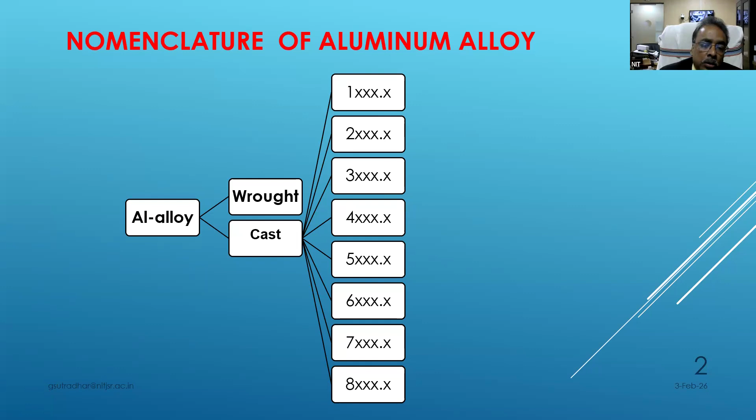Now I will show you. When it is 1 dot dot dot dot, normally we are using it as an unalloyed composition of aluminum only.

When 2 is coming, that means copper is the major constituent of the alloy. When 3 is coming, it is aluminum silicon alloy. 4 is coming, it is also aluminum silicon alloy binary. Then 5, previously 3 was aluminum silicon alloy with copper.

5 is coming when the aluminum alloy contains magnesium as a major element. Like this, the nomenclature continues up to 8. 8 means aluminum alloy containing tin as a major alloying element. So this is the basic structure where a person could understand the major alloying constituent in a particular alloy.

Now, during my lecture, I will use 3 abbreviations. That is solution heat treatment. Normally we do this for non-ferrous, particularly aluminum alloys, which are very responsive to heat treatment. Normally T6 is used, which is a little different from ferrous heat treatment, and that is called T6 heat treatment. It is already written in specific customer specifications that you should follow the T6 heat treatment.

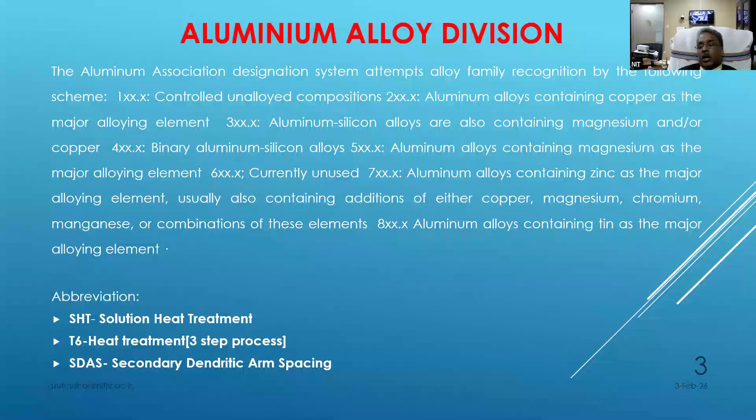So these are the abbreviations I will use. Now, the question is, why is aluminum and copper alloy preferred to other ferrous alloys?

See, normally we know that nickel-based iron alloys or different types of steel alloys where manganese is present are basically preferred for high temperature applications. But its density is much higher than aluminum. Aluminum is almost 1/3 the density of steel and cast iron. So to get the advantage of lighter alloys over ferrous alloys, aluminum alloys are being preferred.

So in this case, we have taken only aluminum, copper and its series. We have tried aluminum copper alloy and tried to see how it performs at high temperature applications.

Now there is a thumb rule. Many people, I cannot say any single person, but it is almost a thumb rule that if you want to make a car, or any automotive or prime mover, you could make it energy efficient by 25%, because we can get that if we make 35% weight reduction.

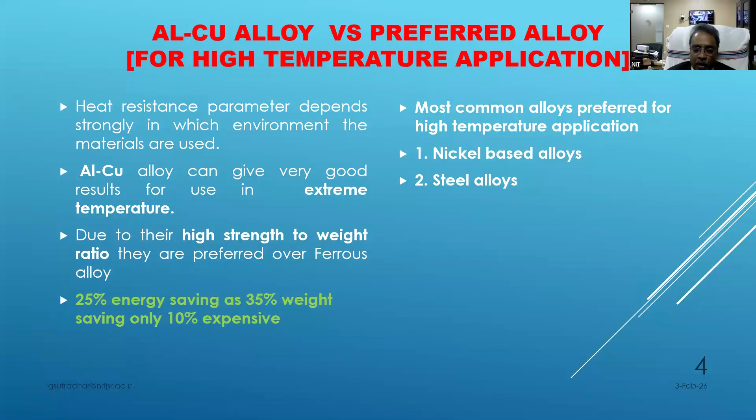Number two, now aluminum is normally alloyed with copper, magnesium, silicon as the major alloying elements. These elements - copper, magnesium, silicon - help increase the tensile behavior of the alloy. Even aluminum with copper and magnesium can give good mechanical properties under high temperature applications.

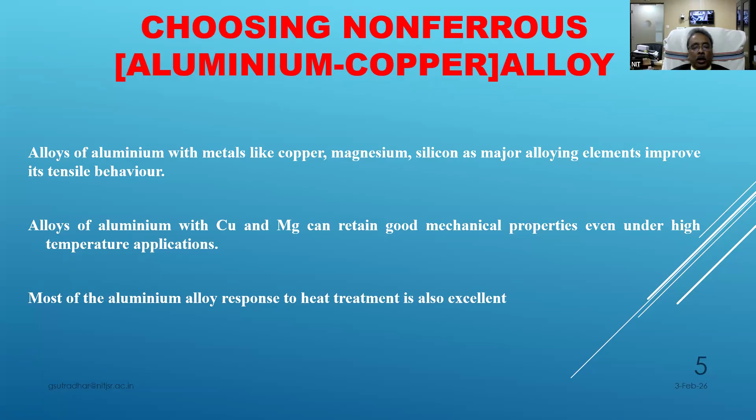Now it is also observed during our study that most aluminum alloys are very responsive to heat treatment. Now, this is another part I am telling you.

Now I am talking about high temperature. What is high temperature? Normally, from literature, it is observed that around 200 to 250, almost 260 elevated temperature is considered as a boundary condition.

That means we work within the limit zone of 250 degrees centigrade. Number two, whatever castings we make, our objective is that it should be good castable. If the castability is very poor, whether in sand molding or gravity die casting, it cannot fill the cavity. So considering castability, we have to optimize the alloy composition as well as the mechanical and metallurgical properties of a component.

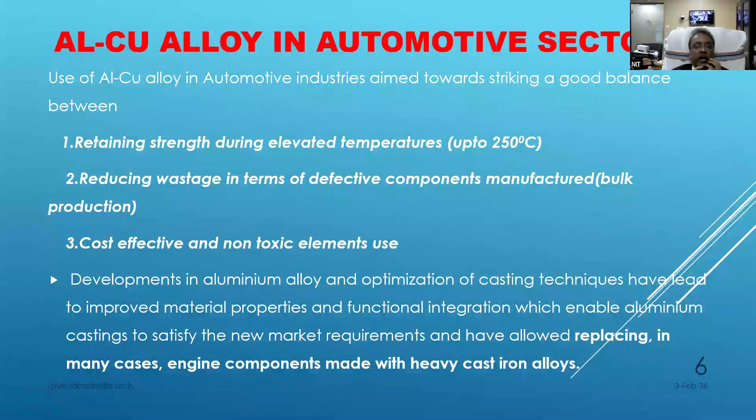We always think the product should be most cost effective. That's why we consider aluminum alloy and optimize the casting technique, meaning castability and improved material properties with functional behavior. Functional behavior is very important, whether that aluminum casting is used for a manhole cover or for automobile engine parts like cylinder head or cylinder block castings, or aerospace parts like an aeroplane seat component. So where it is basically used matters; functional behavior is a very important part.

Now if we consider any passenger or normal car, total engine parts is around 50% of the total weight. Out of that, 90% comes from cast aluminum. So if total car weight is 100, engine parts is 50 kg. Out of that, 45 kg is from cast aluminum, and the rest 5 kg is from wrought aluminum, either forging or extrusion part.

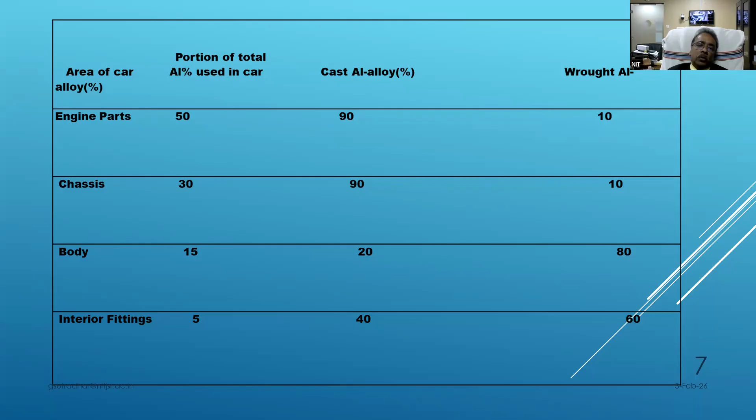So maximum is 10% wrought. Now chassis is basically around 30% of the total car weight. If car weight is 100, chassis must be 30 kg. Out of that, cast alloy is around 27 kg, and the last 3 kg is wrought aluminum alloy, similarly for the body. So major car weight is 50% engine part, 30% chassis, 15% body, and 5% interior decoration.

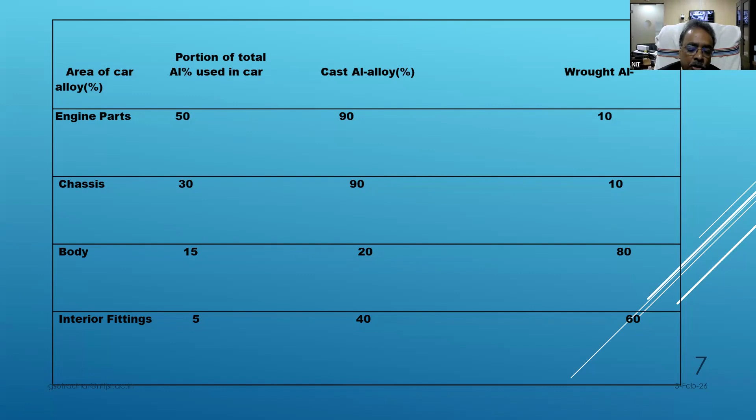The interior fittings, which is 5%, is going to increase day by day because of the luxury demands of customers.

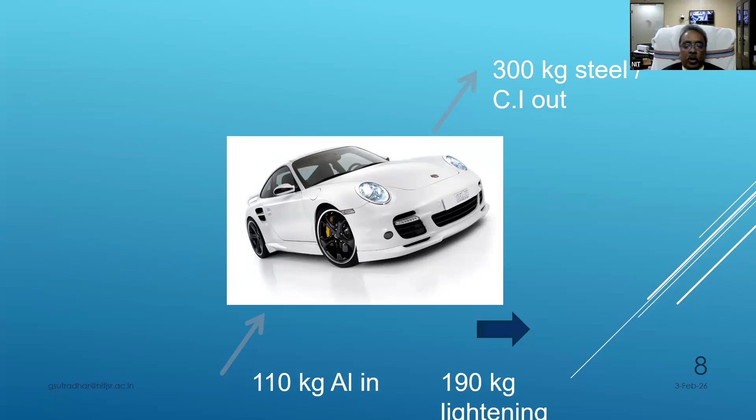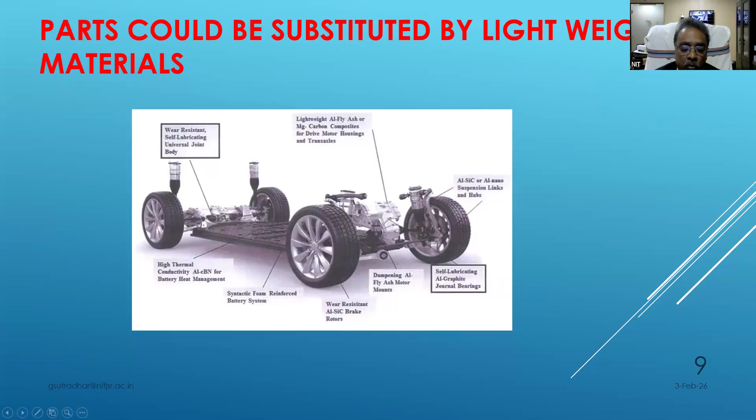From the literature, or as my student has found, exclusively for body parts, auto body, aluminum has good formability. Along with castability, formability is needed for sheet metal working, and drawing capability is also very good.

I want to mention that British Land Rover uses a V8 engine block made from aluminum alloys. Other parts like wheels, transmission, cylinder heads, and suspensions are also really made from aluminum alloy only. Now electric vehicles are taking a strong lead in the automobile sector, and they also choose their main components from lightweight material like aluminum.

So our basic objective in this research work has three parts. The first part is the development of an alloy system, preferably without silicon. The silicon here is only making the wrought aluminum or aluminum-copper master alloy. A very trace amount of silicon is already in the master alloy, but we are not adding any silicon in the master alloy. It will be aluminum 50% and copper 50% as the master alloy.

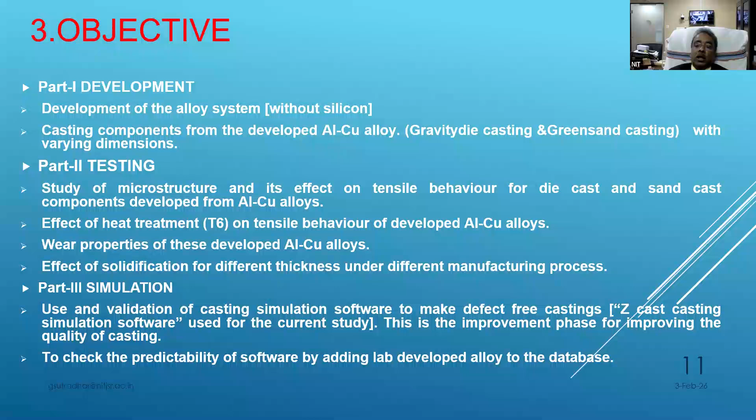Now, this ZCast software has some database. Now, with that database, the validation of this present alloy was also done, along with the database in that software.

So now, when developing any new alloy, what is happening? It is from the normal alloy, the process what we are following. One is the nucleation process, which happens to any alloy, then crystal growth, then grain structure, and the effect of additives on aluminum copper alloy are subject to studies.

Now, according to scientists, shear assisted processing and extrusion technology can eliminate heat treatment steps. This is because normally, processes like extrusion and forging do not need any kind of further processing, as the process itself takes care of it. But casting needs some additional secondary processes.

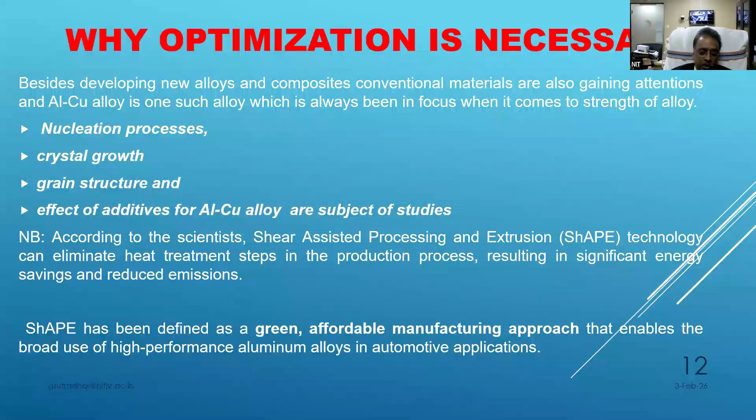So again, ShAPE is basically shear assisted processing and extrusion technology. We define it as the green affordable manufacturing approach that enables broad use of high performance aluminum alloy in automobile component applications. Now, what exactly does the literature say?

The literature gives something, because any PhD student, before starting the work, has to define his or her problem, and that is the literature review. Normally, we researchers find that almost 25 to 30% of time is basically involved in literature review. Otherwise, his or her work will not stand internationally. So that's why, if it is a 6-year project, almost 2 years actually go into defining the problem, finding which area is untouched or very few people have studied.

So literature says that aluminum copper alloy gives very good strength at room as well as under high temperature conditions, around 150, as already mentioned.

Now, heat treatment improves again its strength, its wear characteristics, and also the characterization of cast aluminum copper alloy. We have seen that finally the solution heat treatment was done. I will show the graph.

We will show the heat treatment curve, and after that we will find out that Al2Cu, which is basically the theta phase of the alloy, stays in the grain boundary and acts as a strengthening element, increasing in the grain boundary with the copper content. If you increase the copper content, then Al2Cu comes into the grain boundary and increases, and as it increases, the total matrix gets more strengthened.

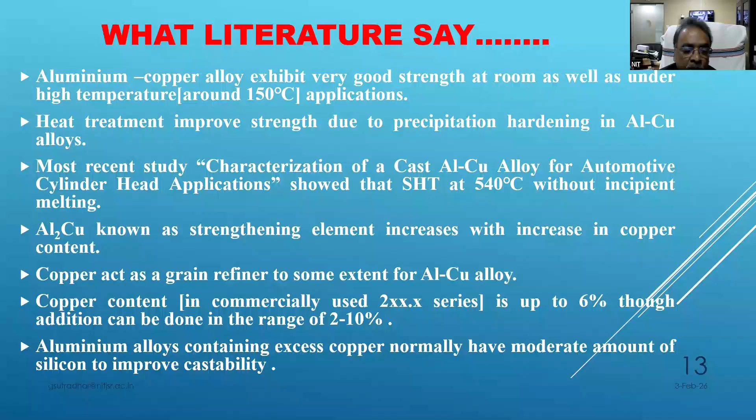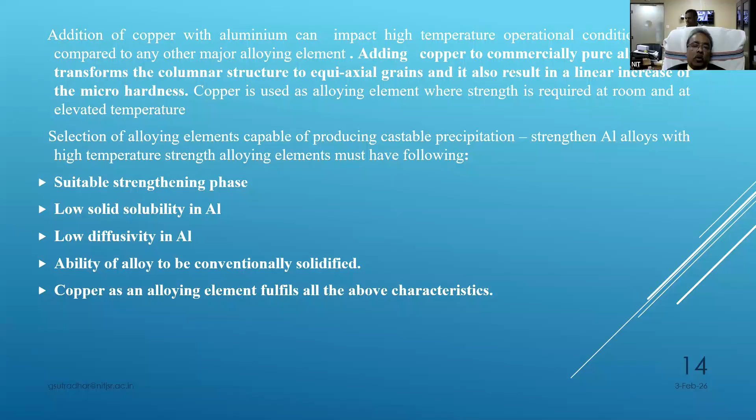Addition of copper with aluminum can impact high temperature operational conditions. If you want to make copper in the pure aluminum, the columnar structure and equiaxial grains result differently. I will show you when we see different amounts of copper in the material.

Now the recent important element is silicon. What is the effect of silicon in the aluminum matrix? We have already found out that copper in pure aluminum is chosen, as I said, maybe 2 to 10%. At room temperature and elevated temperature, we find that aluminum alloys commonly used are added with copper for improving strength and silicon for better castability. Even the corrosion resistance, as well as the strength, is improved at ambient temperature.

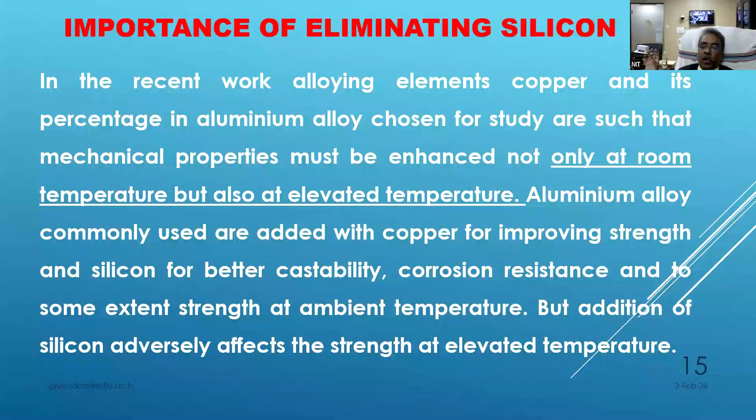But addition of silicon adversely affects the material after some point of time. If it is under elevated temperature, that is 250 and above, then silicon addition should be restricted after some time. So this work, actually, I will show you.

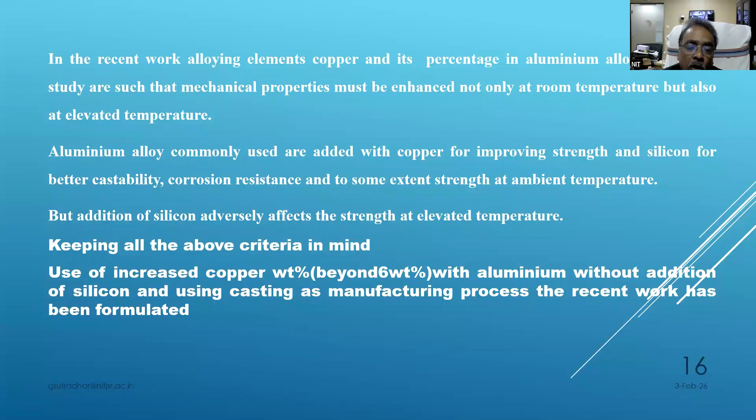Increased copper weight beyond 6% with aluminum, without addition of any silicon, using casting as the manufacturing method, has been formulated in recent work. We conditioned that we will go a little more than 6% of the weight of copper in aluminum, and without allowing any silicon, study how the material will behave, because silicon is not recommended at least at 250 degrees centigrade or above functioning conditions.

Now I will explain why copper is chosen. In this experiment, we have taken three things with minimum weight for copper addition in aluminum. We used a master alloy and went on adding aluminum to dilute it. Assume we have taken 300 grams or 300 units of aluminum-copper master alloy. From that we took three divisions, 100, 100, 100. From the first 100, one alloy was made with 4% copper - we go on adding from 50%, by calculation, slowly with the copper-aluminum master alloy. Then we want 8%, and maximum is 12%. So our main focus is 4 to 12% weight of copper in aluminum.

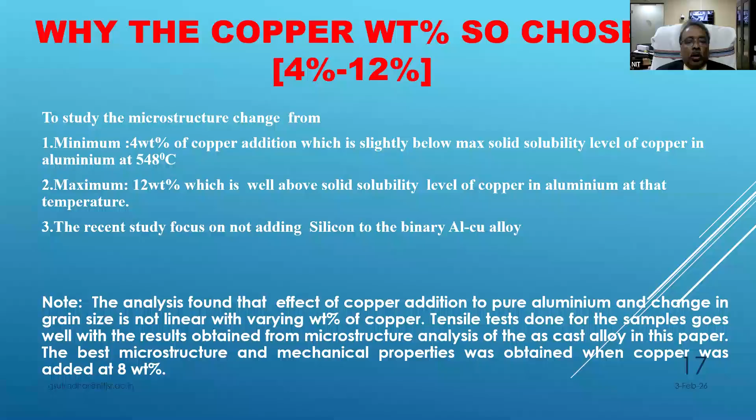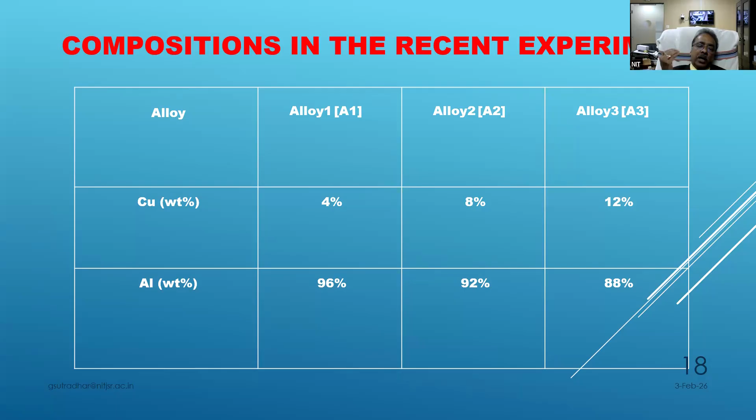Now see what is happening. This is alloy number 1, which we named A1. Then alloy 2 is A2, alloy 3 is A3. What is the difference? All the alloys have only a trace amount of silicon - below 0.001%. So copper is 4%, aluminum is the rest for A1. Alloy 2 is 8% copper and 92% aluminum, and alloy 3 is 12% and 88%.

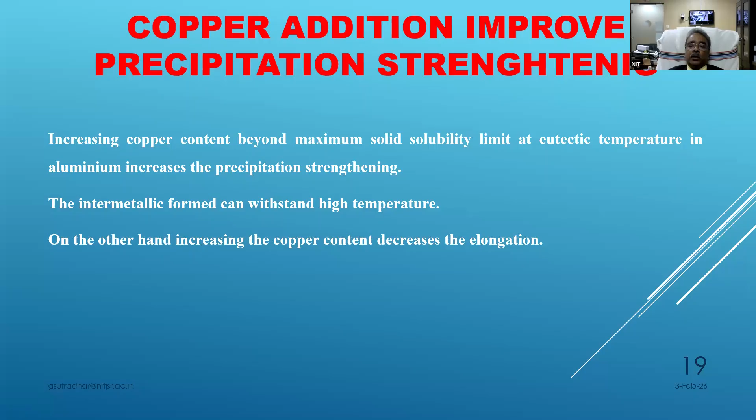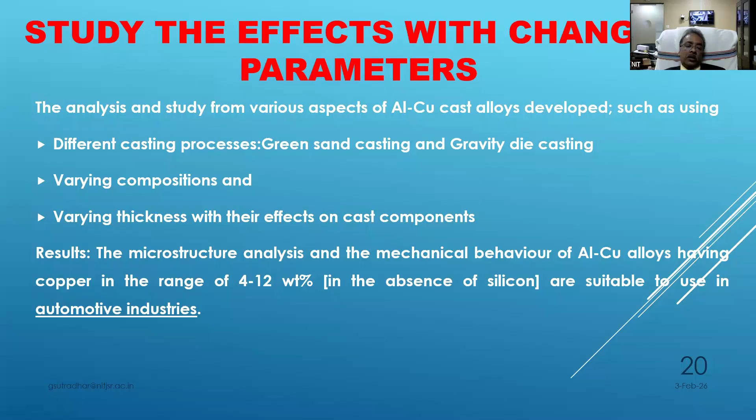Now what are the other parameters? We have worked in the green sand casting environment as well as gravity die casting. We changed the variation and also studied under different section thicknesses - the same casting having different cross sections. So what result is coming? The microstructure analysis and mechanical behavior of aluminum-copper alloy, having copper in the range of 4 to 12% in absence of silicon, is suitable for use in automotive industries, because engine parts or engine-related parts operate at temperatures of 150 to 250.

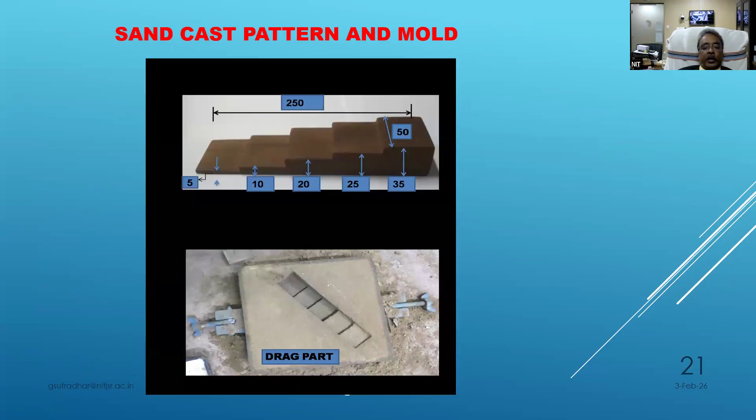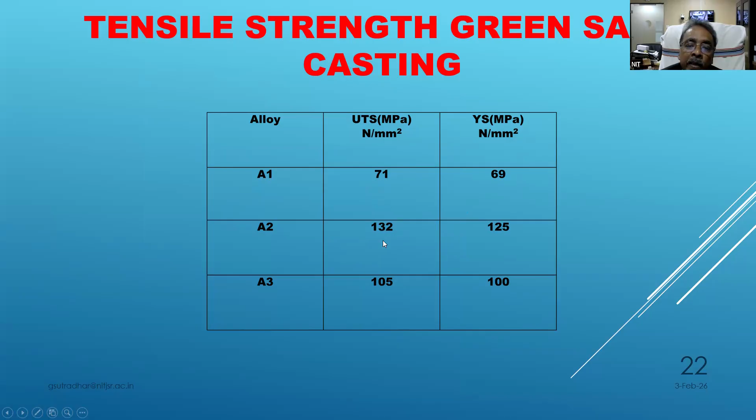So this is the pattern you can understand - that is a wooden pattern, and that is the drag part of the pattern. Then we have taken results from the different alloys. That is the A1 alloy, showing UTS, then yield stress. You can see that the 8% alloy is giving maximum UTS and maximum yield stress.

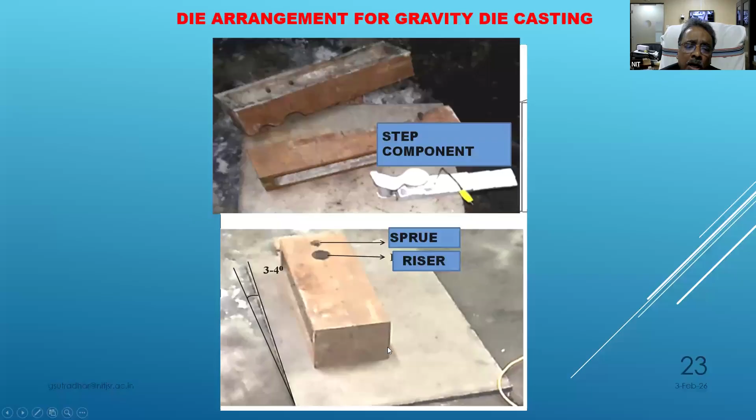Now the copper addition benefits and drawbacks. What are the differences, or challenges? Copper is added to aluminium when strength is a priority. Aluminium-copper alloys are very heat treatable and preferred for elevated temperature applications, as mentioned in our main title.

We have tried to see the mechanical properties of the aluminum alloy, and we have found out the castability. Corrosion resistance and ductility decreases.

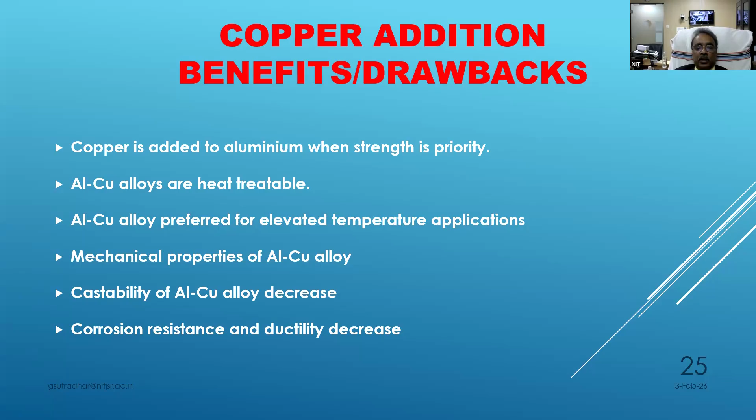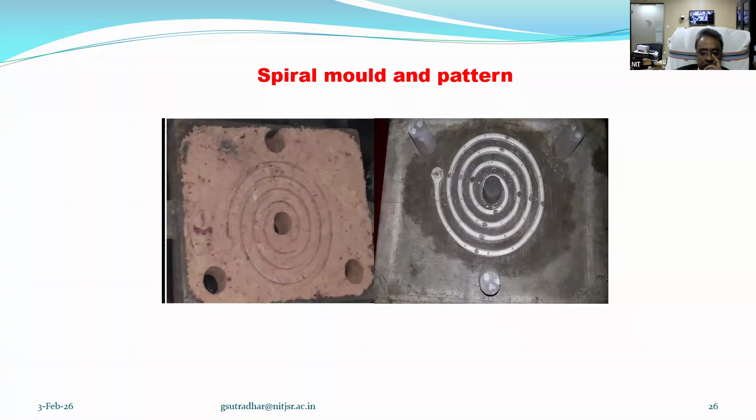So this is the spiral mold. This is a very old experiment. We put it under different temperatures, and the length of the spiral actually shows the castability. After that, we made all the points, and then we took the heat treatment.

This is a very peculiar and common heat treatment, the T6 I mentioned earlier. There is one step called solution treatment, which people in industry call solutionizing. Next is quenching, and after that, aging. So there are three steps.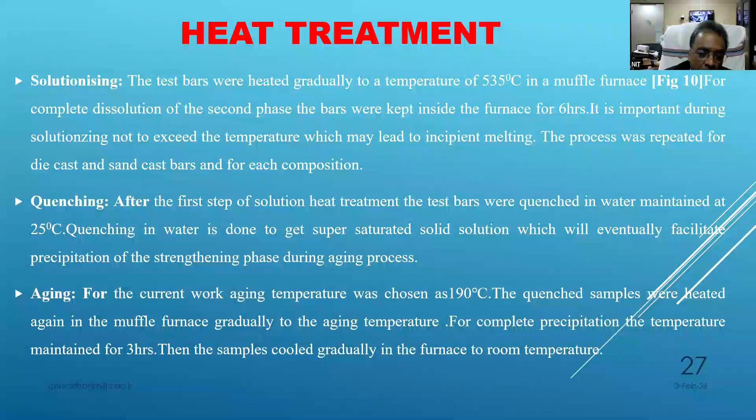I will show you the graph. First, in the furnace, this is room temperature, say 25 degrees, and it goes up depending on the alloy. If the basic alloy is LM11 or LM25, normally it is 520 to 535 degrees for heating.

This is the soaking zone. It depends on the thickness of the casting—it may be a minimum of 1 hour up to 8 hours, or even up to 8 to 12 hours. Then it immediately falls to around room temperature, and stays for some time.

Then it heats up again to 170-190 degrees, and this part is called aging. Basically in aging, it is precipitation hardening, as people also call it. These 6 hours are for this particular alloy, but for other alloys like LM25, LM9, or LM11, this may be 8 to 12 hours, and precipitation hardening may take 3 to 5 hours.

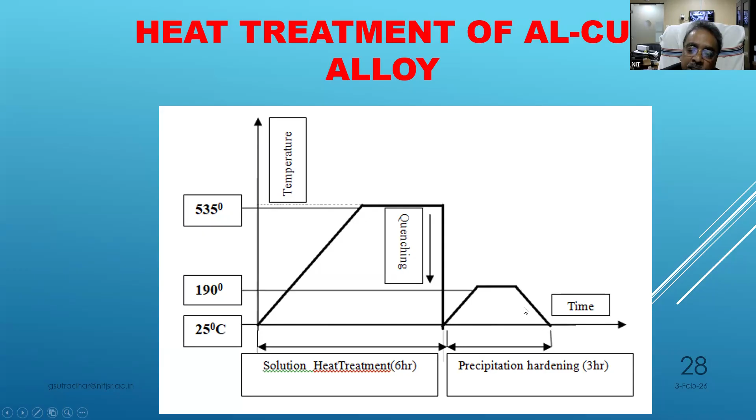After soaking, the total hours add up—roughly 1 hour here, 1 hour there, but it changes depending on the alloy. Now, if heat treated, the alloys change again, but this A2 with 8% copper still gives better results compared to the other two, even after heat treatment.

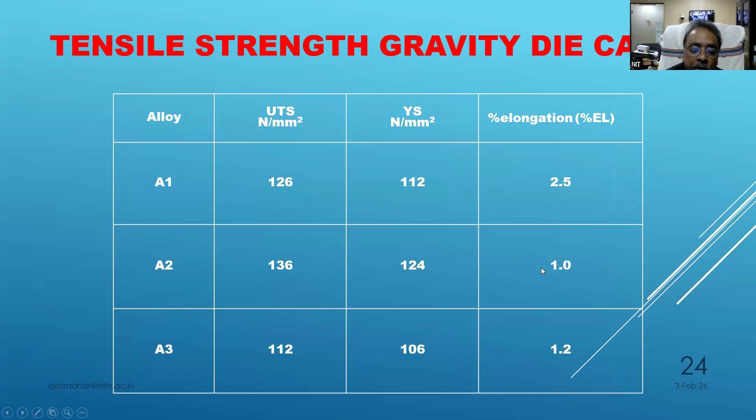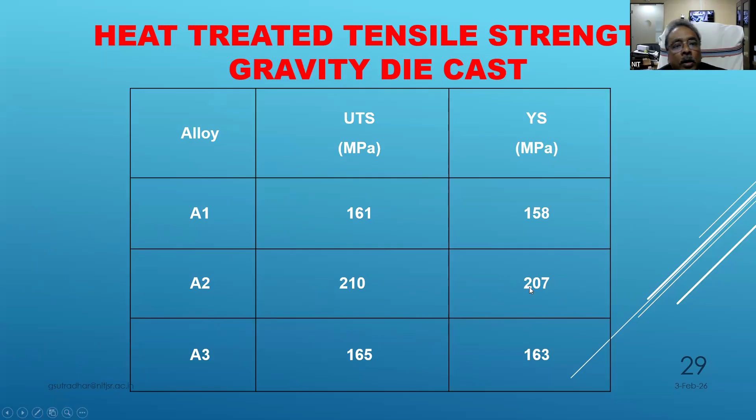Remember, at that time it was gravity die casting, with values of 120, 136, 124, and elongation of 1. Now after heat treatment, this 136 comes to 210, and yield stress also improves too much. So properties are improving after heat treatment in gravity die casting.

Now the metallographic properties—because the metallurgical and mechanical behavior of any component depends on the intermetallics present in the matrix. This study shows that the presence of intermetallics not only improves mechanical behavior, but does so in both cases, whether unheat treated or heat treated. Definitely, after heat treatment, the presence of intermetallics helps improve mechanical behavior.

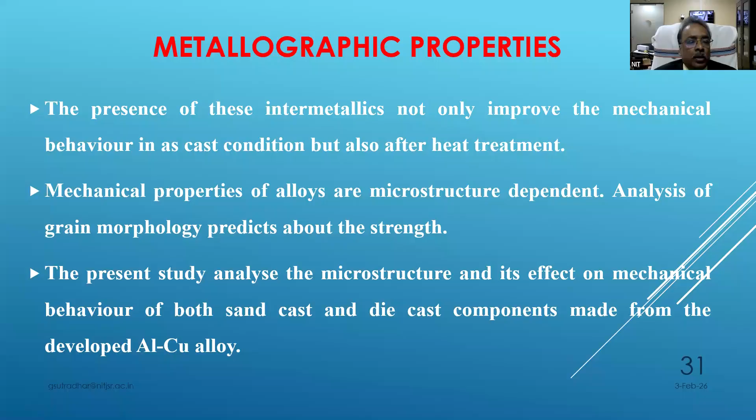Mechanical properties of alloys are microstructure dependent. We analyze the grain morphology—what is the grain size and what is the arm length. From that, we can find out how the property will be. The present study analyzes the microstructure and its effect. I will show you in the microstructure.

See, this is the SDAS, the secondary dendritic arm spacing. SDAS is high here, this is the lowest. If it is lowest, that means you get very close contact, a compacted grain structure, giving tightness.

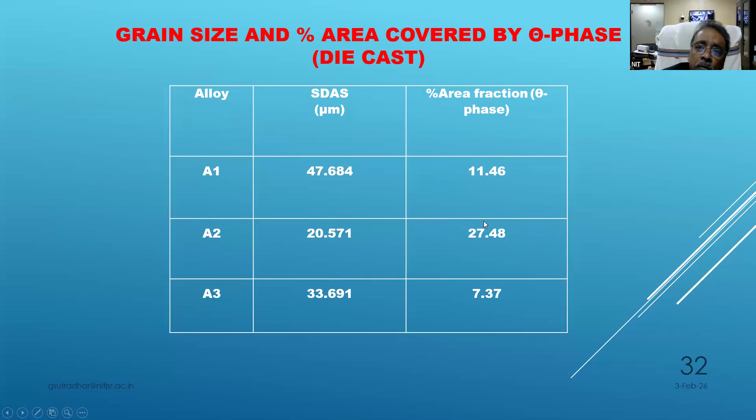So as tightness is there, you see the area fraction of theta phase, which is Al2Cu. That percentage in the matrix is 27%. In other cases where copper is 4%, the dendritic arm spacing is 47, a bigger size, but the area fraction is also less. It's a bit less again at 12%. So 8% gives the best results.

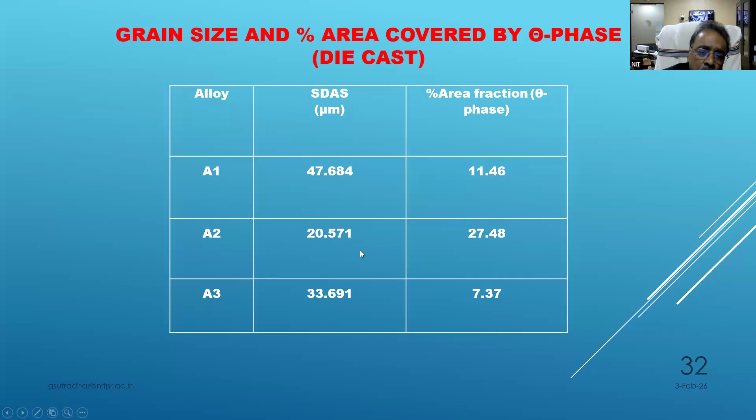It was noted that in die casting, the second phase at grain boundaries are finer and fibrous, whereas in green sand casting they are coarse and plate-like. Die casting basically gives very high cooling rate, and this high cooling rate along with the copper gives very fine grains and very compact structure, so that distance is very less and it is giving very compact results.

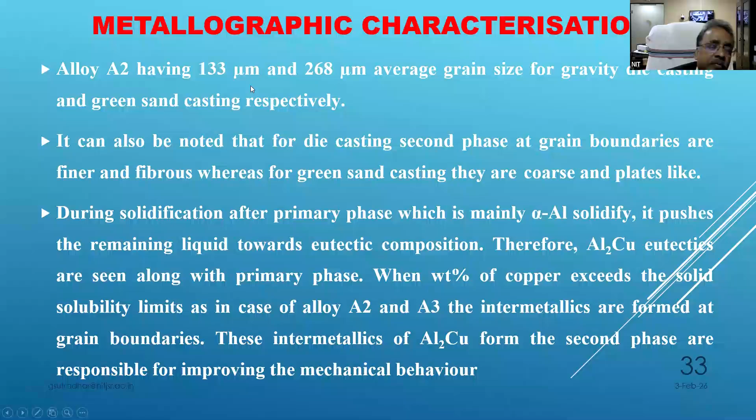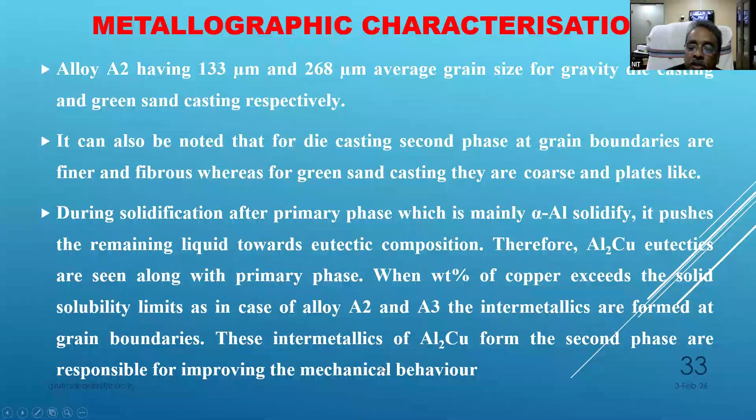During solidification, after the primary phase, which is mainly alpha aluminium, is formed, it pushes the remaining liquid towards the eutectic composition. Therefore Al2Cu, the eutectic, is seen along with the primary phase. Now when the weight percentage of copper exceeds 8%, that means in case of alloy it exceeds the solubility limits, because the actual solubility limit is 6, this is 8, and this is for 12. The intermetallics formed in the grain boundaries, these intermetallics of Al2Cu, form the second phase responsible for improving the mechanical behavior.

If you see this structure, this is basically the optical microscopy of green cast components before heat treatment. This is for 4% copper with the same magnification. This is Al2Cu still more, and this is for the 12%, where the grain boundaries are very, very visible to the naked eye. At this magnification, 200x, the Al2Cu amount is going up more, and this is basically what is increasing the hardness.

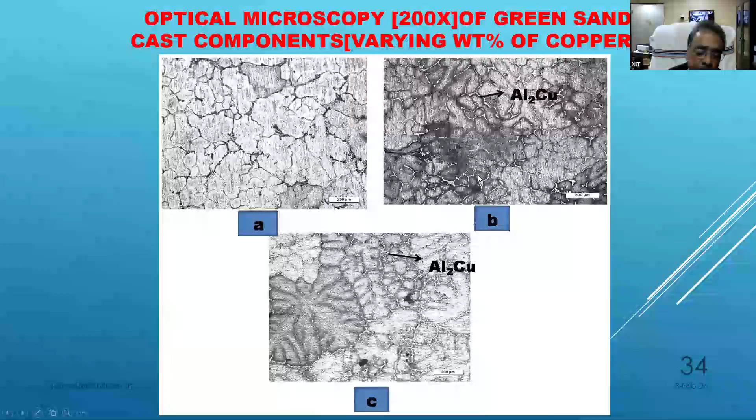So this is for die casting and sand casting composition. You see how this part is more thick, so in that case the grain size is coarse. At the next composition it is a little medium, but here the exception is that again it is going more, it becomes coarser. But here, in between the grain sizes of sand cast and the same composition, the die casting gives the best result.

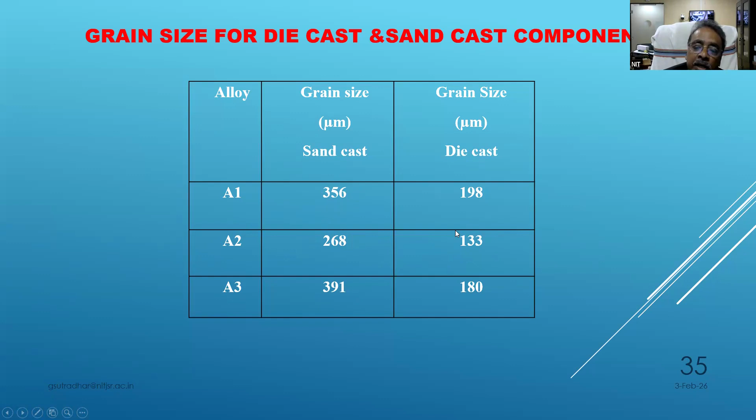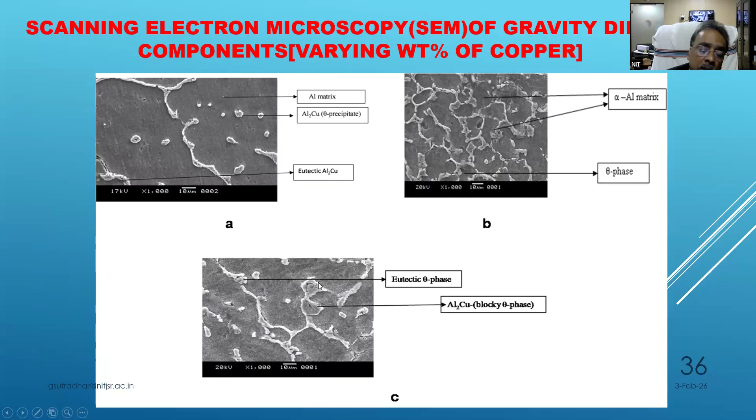This is another one, scanning electron microscope, to find how gravity die casting works under different conditions. At only 4% copper, the theta precipitation in grain boundaries looks like this. When improving from 4 to 8%, the precipitation of theta phase is increasing, with alpha aluminium, pure aluminium, in between. Then, as you increase again when the percentage of copper gets to 8 to 12%, it varies further with the percentage.

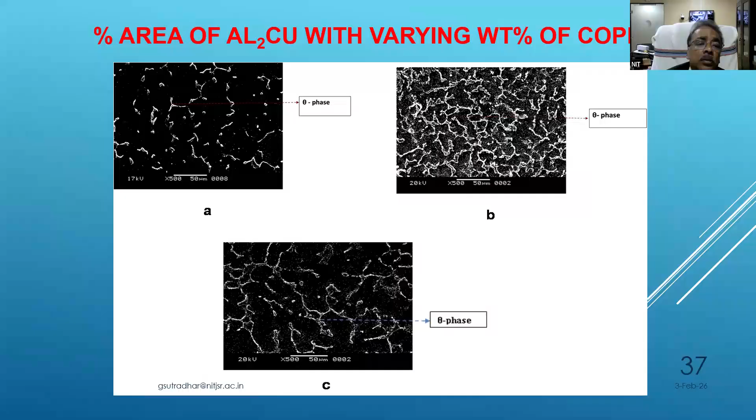Same thing at lower magnification, again SEM. You see this is the lowest, that is more tightness, and this is more volume compared to if you go for more copper. So it is visible that it depends on several things, because the cooling rate is also important, as well as the percentage of copper.

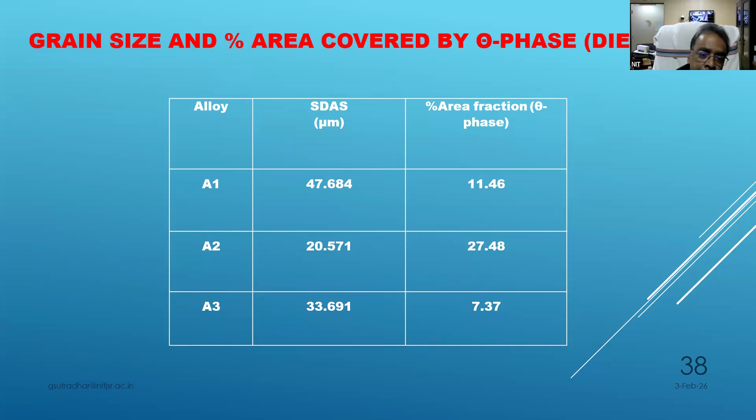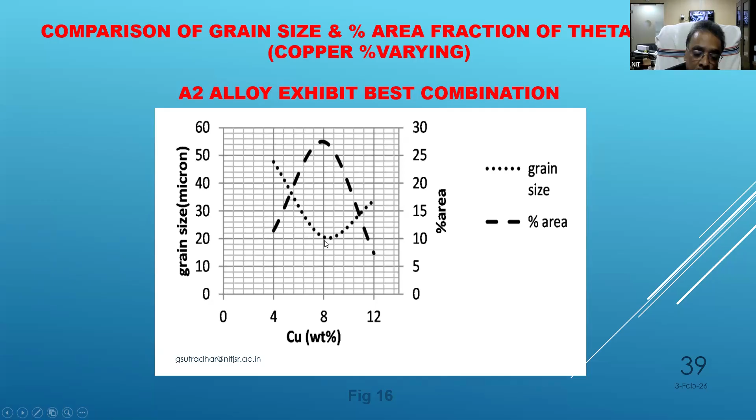Now the simulation, what we actually want to do, is because we want ultimately a defect-free casting, so changing the riser dimensions if anything happened. My student, Dr. Tripathi, did this: the diameter at the base of the riser for the existing cast iron mold is 20 millimeters. In different iterations in the virtual process, because we can't spend that much time in the laboratory, it is difficult. But in simulation, you can do n number of iterations.

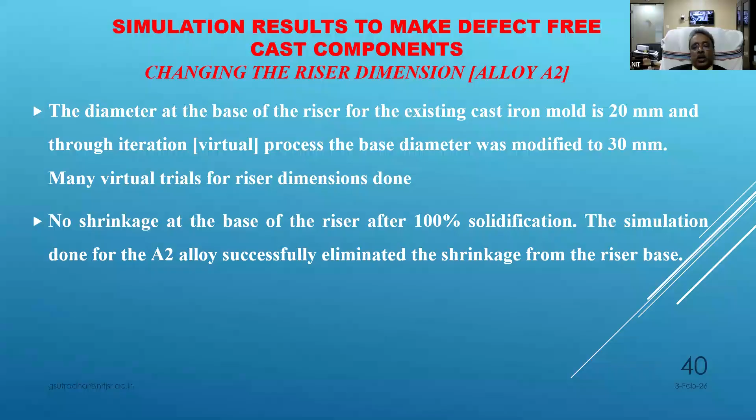In that n number of iterations, the base diameter was modified to 30 millimeters, and this ultimately came from the simulation. In that case, when taking 30 mm as the diameter of the base, there is no shrinkage of the base of the riser after 100% of the solidification. So the simulation was done for the A2 alloy successfully, and it eliminates the shrinkage from the riser base.

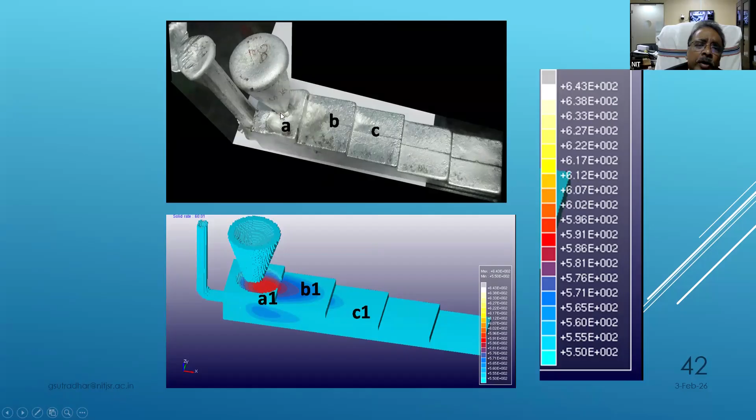It's a real picture he has taken, showing the highest part with little shrinkage with that small 20 millimeter base.

But I don't know why she has not given me the diameter of 30, but there is no shrinkage.

So anyway, the aluminium having 8% copper, in the absence of silicon, exhibits poor quality of casting components, both in green sand and gravity die casting. Shrinkage cavities at the base of the riser have been noticed. Compared to alloy A1, the size and length of the shrinkage cavities are bigger for alloy A2, keeping other factors such as mold temperature, riser size, and pouring temperature constant—only the increase in copper percentage affected the cast quality.

Dr. Tripathi has published 2 papers and 4 book chapters in different places.

Finally, I would mention that this work is what she has done, except there were 2 years of COVID. At that time the college was almost totally closed, so she could not do many parts, but still the novelty of her work and the genuineness of her hard work stand out, and she has been given a PhD degree from Jadavpur University, I think in 2023 or 24.